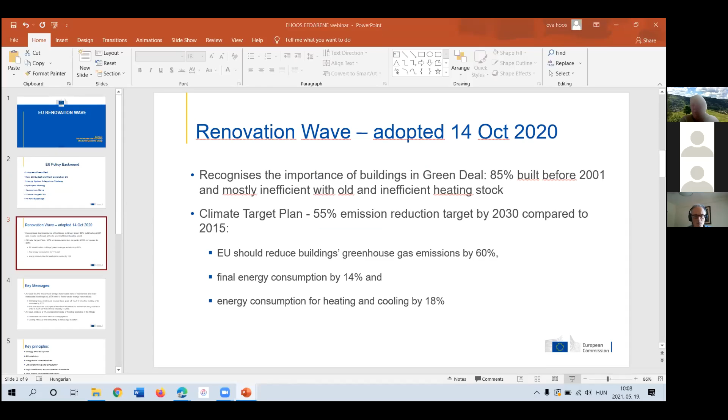So the renovation wave was adopted last October, and this recognizes the importance of the building stock, 85% of which was built before 2001. So that means basically before any energy performance requirements had been applied, at least at EU level, even if some member states already had such type of legislation in place.

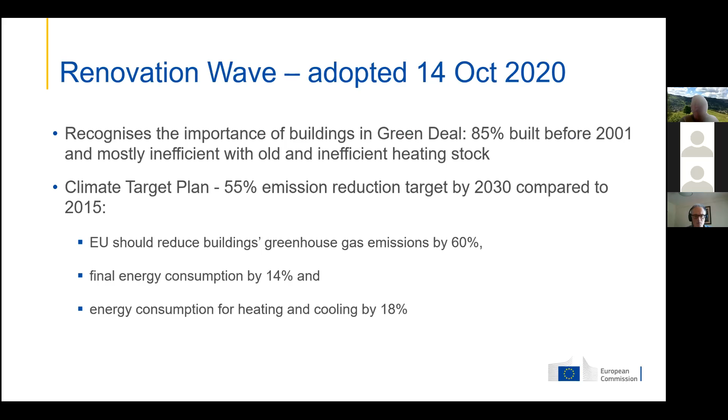As a consequence of the 55% emission reduction target already in 2030, there is a need to reduce buildings' greenhouse gas emissions by 60%, their final energy consumption by 14%, and within this, the energy consumption for heating and cooling should be reduced by 18%. The key message of the renovation wave is that there is a need to increase the renovation rate of the building stock, which currently is around 1 percentage point as an overall average.

Obviously, there are segments of the building stock and also countries or regions where there is a high renovation rate, but overall that's very low, 1 percentage point. And if we go with that rate, then building decarbonization is not going to be achieved really in the next 100 years, or it would take even longer to do that.

So there is a need to increase the renovation rate of buildings to at least double what we have today, possibly even higher. And such speeded-up renovation should continue beyond 2030 and up to 2050 to contribute effectively to the Green Deal objectives.

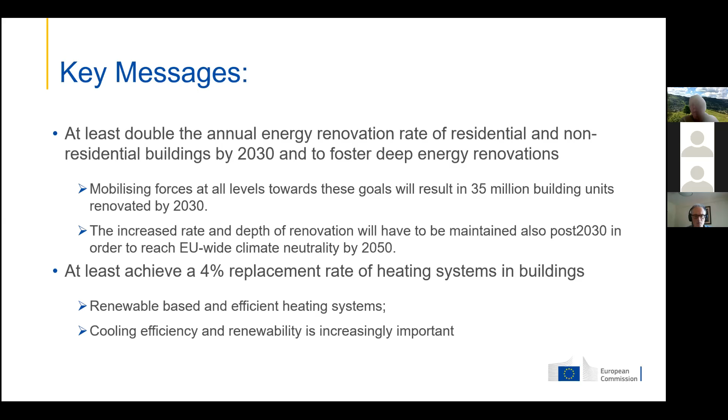A corollary of this deep renovation and staged renovation of the EU building stock is that we also need to replace the heating systems and the cooling systems in buildings, and it's not in the renovation wave, but in the climate target plan that we need to achieve at least a 4% replacement rate annually to switch buildings' heating and cooling systems from the current fossil-based and largely inefficient systems to something that will be sustainable.

The key principle of doing this work is energy efficiency first, which has been introduced in the clean energy package as an overarching principle that should be mainstreamed in all EU energy policies and even wider in all EU policies. That means that instead of focusing on new production capacities, new networks, and the related investment, there is a need first to look at whether we can reduce demand or do production and consumption more efficiently.

And then after this consideration, we can optimize how much new investment is needed in energy generation and energy transportation and distribution. A second important principle is affordability. Buildings are a big part of our lives and an important part of the value or wealth that citizens have. It's also an important component of our expenditure.

So there is an important aspect of affordability and making sure that building renovation contributes to increased well-being and also doesn't result in income inequalities and more burden on the low-income segments of the population.

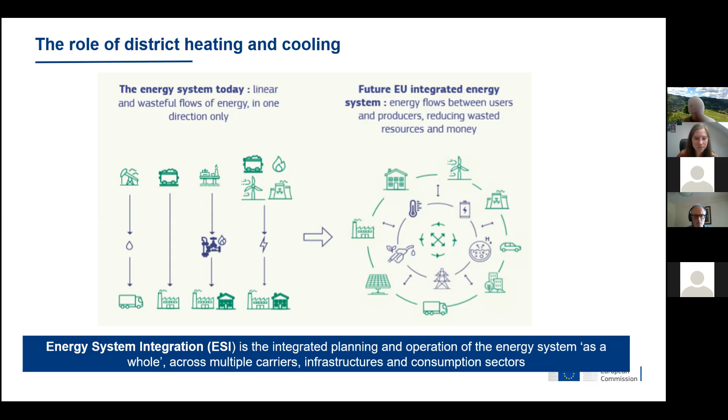The new systems that are going to be built should be fully based on the principles of energy efficiency and renewable integration, but also system integration in a way that they contribute to decarbonize the entire energy system by allowing more flexibility, by using renewable electricity, and helping optimize the energy system by also optimizing how renewables are used and how the carriers are used in heating and cooling, also allowing a connection between the heating sector, cooling sector, and the electricity sector, and the gas network and gas carriers, which also need to be decarbonized.

So the follow-up of these strategies is basically a complete reshuffling or revision of the current legislative and regulatory framework. The first step is going to be the Fit for 55 package, which is reviewing a number of directives and regulations that are interlinked, so to really be able to tackle issues that are horizontal and have regulatory components in the Renewable Energy Directive, in the Energy Efficiency Directive. Also, there is a need to update the EU emission trading system, the effort sharing regulation and energy taxation. So these are the main relevant pieces of the Fit for 55 package that is planned to be adopted already this June.

So it's basically next month to do the first stage of update for the market framework to ensure that market signals and carbon price signals are helping investment in this direction and in the green transition, but also the regulatory framework. Now, as a next stage to that, there is going to be a review of the energy performance of buildings directive with many components in it, and then this will also be followed by the eco design and energy labeling framework update, especially for space heaters and water heaters, to basically ensure a Green Deal compatibility of this regulation.

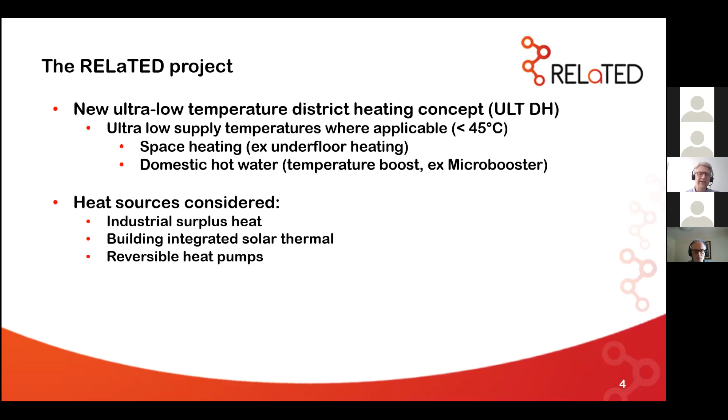The heat sources we are considering for the district heating system is industrial surplus heat. We are also looking at building integrated solar thermal. Then we are looking at reversible heat pumps, and the reversible heat pumps are heat pumps that can deliver cooling during summer, and then distribute the excess heat from the cooling to the district heating network. And then during winter, it can actually boost the temperature, either for boosting the supply temperature for space heating or domestic hot water.

And we have some companies involved in the project that are providing both solar thermal and the reversible heat pumps and also substations. So we have an overall focus looking both at system architecture and subsystems, the economy, demonstration, and dissemination.

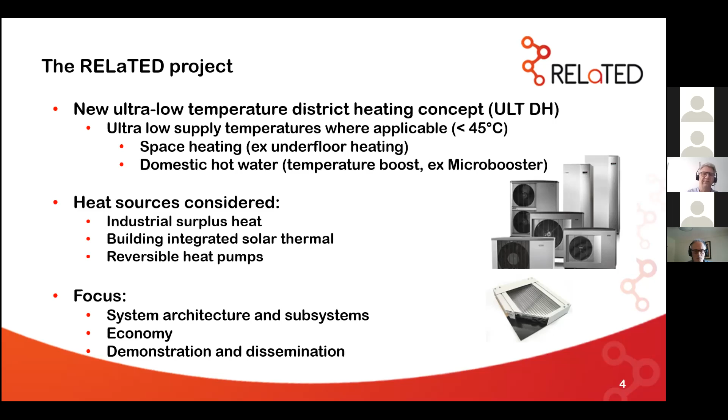Okay, so looking at catching the sun, one of the things is that many of the technologies we got are actually delivering heat at a low temperature, and they are actually also delivering higher capacity factor or higher efficiency if the temperature is low. And then when we apply low temperature, we also actually get some new design options for some of those technologies.

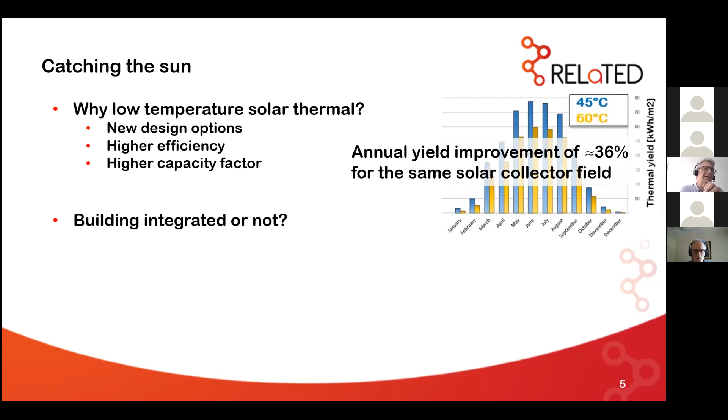Then you can discuss if we should use building integrated solar heating or not. And what we're doing in the RELaTED project is that we are looking at some different solutions. You can have building integrated vertical solar thermal, and this can actually be integrated in the building facade, so it also has an architectural aspect. And then you can of course have something on the roof, and if you look at this nearly zero energy building, then if you use the whole surface of the roof, then you will have about 50 square meters, and that is actually sufficient to deliver quite a bit of heat for 10 houses during most of the summer.

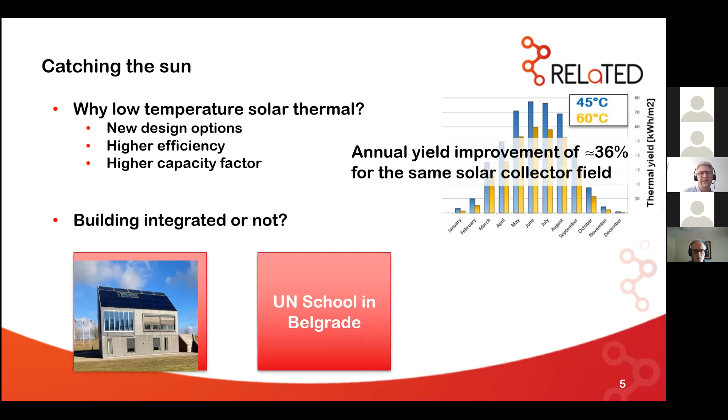We also have some larger systems in this project. We have a school in Belgrade that has some very large roof areas where we are going to integrate solar thermal. And then if we look at what has actually been quite successful in Denmark, you can also have large solar thermal fields. In Denmark, we have more than 1 million square meters of solar thermal installed in our district heating systems now. So, this has actually been quite a success.

The case is that solar thermal in fields is more cost efficient than integrating it into buildings. On the other hand, if you look at the cities, land is a scarce resource. So in those cases, it could be better even to integrate them in buildings, even if it's more expensive.

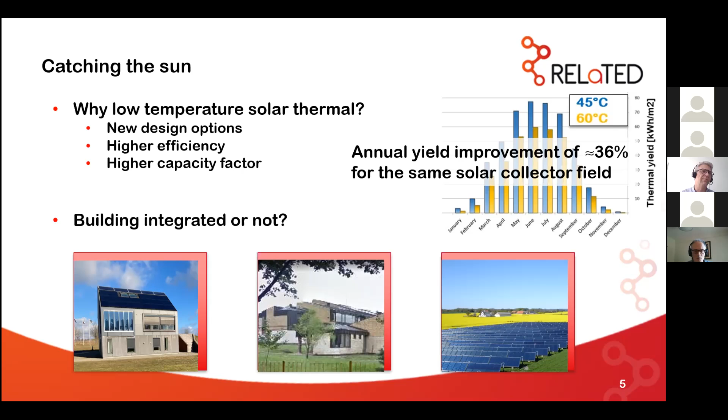Okay, we are gaining some experiences with those integrated solar thermal systems, and one of the places where we do this is in this demonstration facility at the Danish Technological Institute.

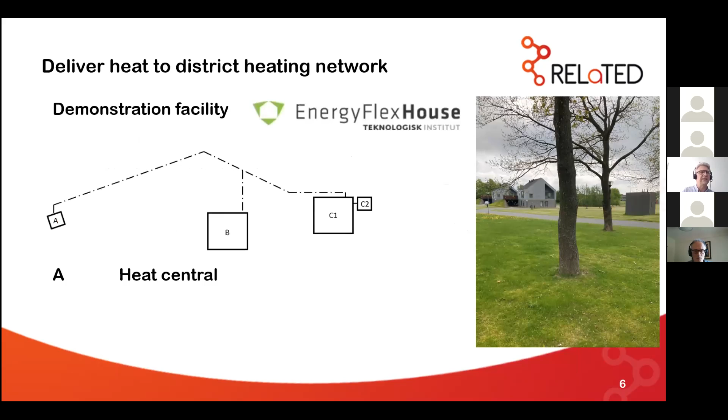We got a system. If you look at A, here we got a heat central, then we got a district heating network distributing heat to a nearly zero energy building, where we have solar thermal integrated, a substation, and a micro booster. The micro booster is a water heater that gets some of the heat from district heating and then boosts the temperature with an electric heat pump.

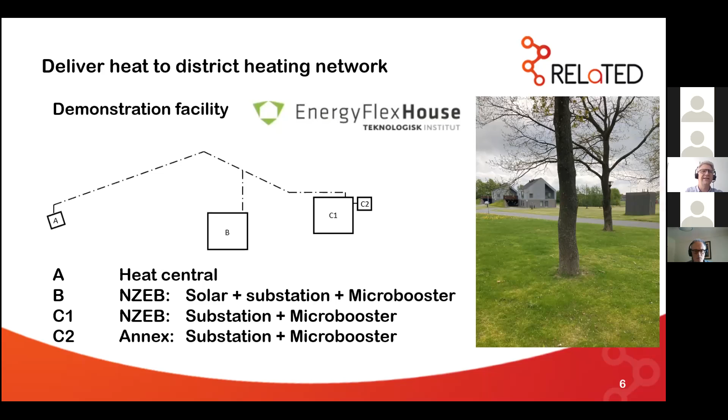Then we have another house, C1, also with a substation and micro booster, and we have a small annex where we also have installed a micro booster and a substation.

So in normal mode, we are taking in district heating, as you usually will do, to deliver space heating and domestic hot water. The water is coming back and goes into the return of the district heating system.

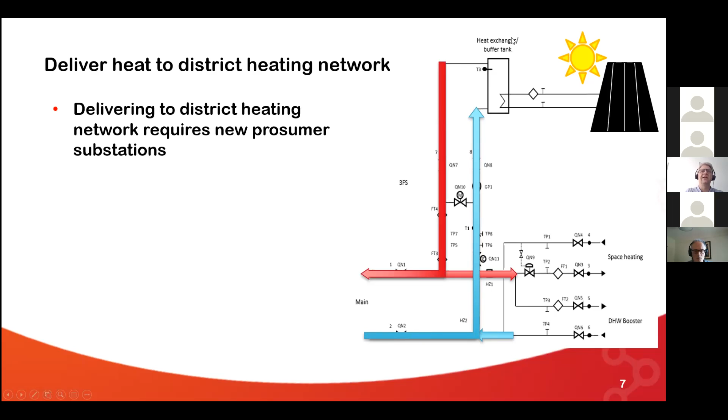When the sun starts shining, the water starts heating up, and when the water is high enough, we have a temperature measurement here to deliver heat to the district heating system. Then we reverse the direction and take in heat from the return pipe and deliver heat back to the system.

To do this, we need to overcome a pressure difference in the network, and we have to control the pump very specifically on that. So this is actually the challenging part of this, to have all this working with the two directions and the pump.

This we call delivery for the supply. But you could also have delivery for the return pipe, and we are also investigating that in some other substation designs, and this will create value.

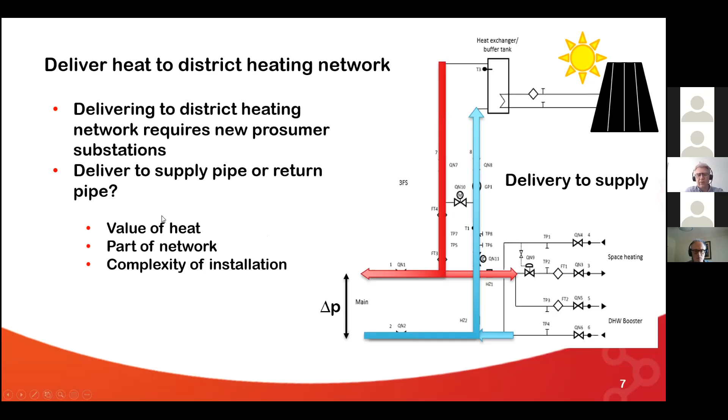To decide if you should deliver to the supply pipe or the return pipe, you need to look at the value of the heat. In some schemes, you do not want to have a higher return temperature, and then it will have more value for the system to deliver to the supply pipe.

You also have to look at what part of the network you are in. If you are, for instance, at the end of the network, it's not easy to put it into the supply pipe. Then you need to put it into the return pipe, and you also have to look at the complexity of the installations needed to do this. So there are some things you have to investigate on site to decide what kind of supply you should do.

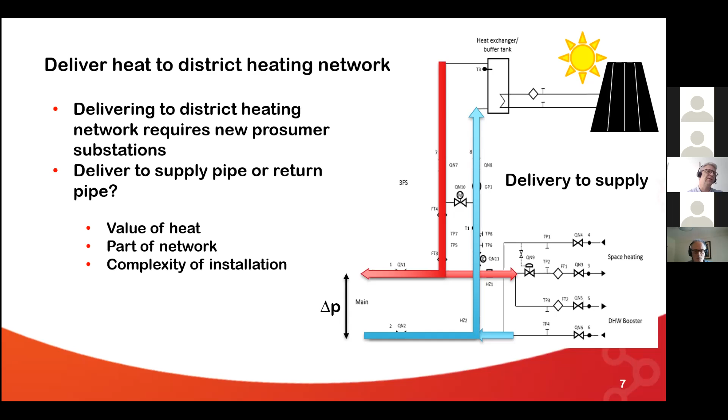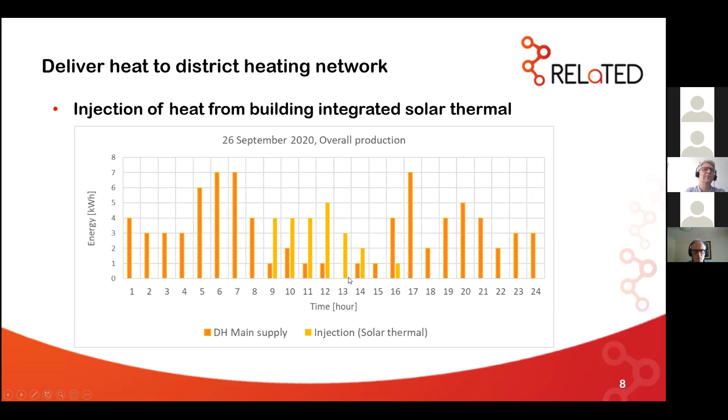At the time of day the sun starts shining, we get some heat injected into the system. But you can see this is, of course, only when the sun is shining, so this is not incorporating any storage.

But in the system, we actually got small storages in every apartment or every dwelling. We got a storage here of 185 liters, and this is the micro booster I talked about before.

So if we look at the tapping of domestic hot water, we got here some tappings during the day. And then when the temperature drops inside the tank, the tank will start charging.

This is done by charging by district heating, which is what we see here. And then on top, we are supplying some electricity to raise the temperature inside the tank to a sufficient level.

Okay, but as you see here, this is actually in some kind of off mode compared to the solar production as we saw before.

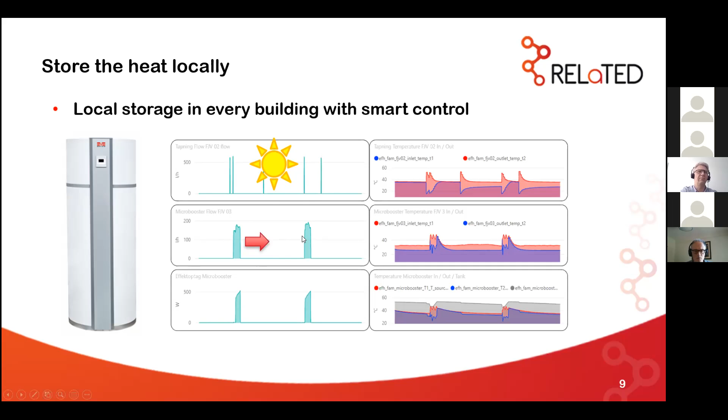So we have here the sun shining during the day, but our consumption is actually outside the period where the sun shines. So to optimize the uptake of the sun, we actually need to move this charging to another period of the day. And that is what we are working on right now, and what we are going to implement during the summer, so that we can control this by price signals, depending on the forecast of the sun and the electricity price.

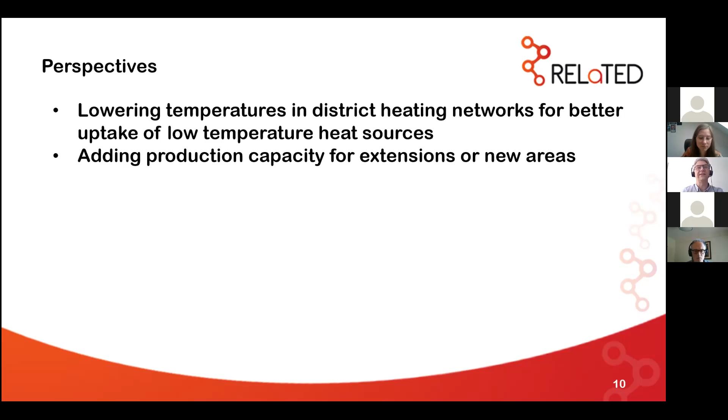So if I should summarize what we get out of the RELaTED project: we are getting experience with lowering the temperature of district heating networks, and that will facilitate the uptake of low temperature heat sources, and also the efficiency of some of the sources we are going to use. By introducing those distributed energy resources, we can add production capacities, either for extensions of networks or for completely new district heating areas.

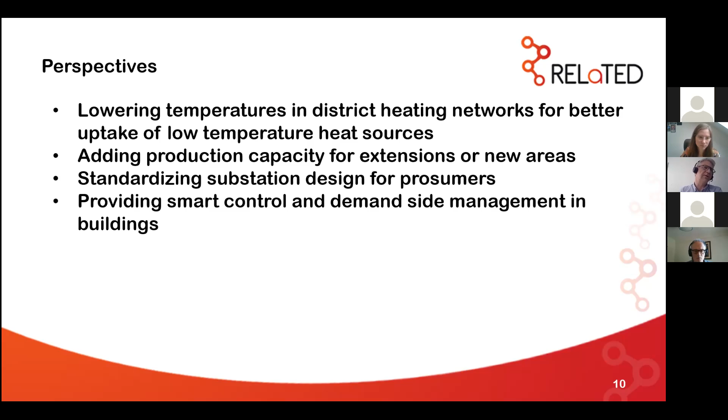One of the experiences we can share already is that we need some kind of standardization of substation design for prosumers, so we can ease the use of the solutions. And we also think there are good opportunities in providing smart control and demand-side management in buildings. Because the controllers of, for instance, the microbooster are quite advanced, we can also start aggregating storage capacity and flexibility in the district heating network, coordinating the flexibility of many sources.

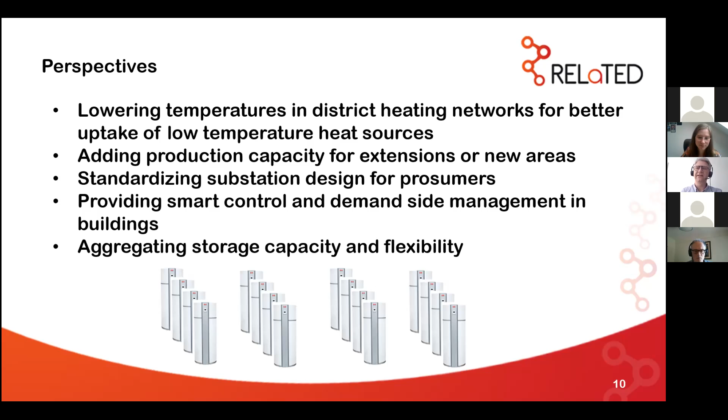Yes, I think that was what I will say today.

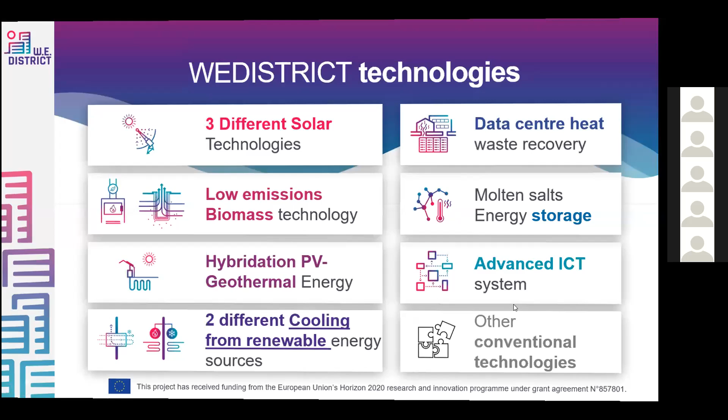Within the solar technology, we are focused on concentrator technologies, mainly the parabolic trough collector, the Fresnel collector, as you can see here, and a new one that is the Advanced Tracking Concentrator for fixed tilt solar thermal collector. That is the one that we are going to talk to you about in more detail.

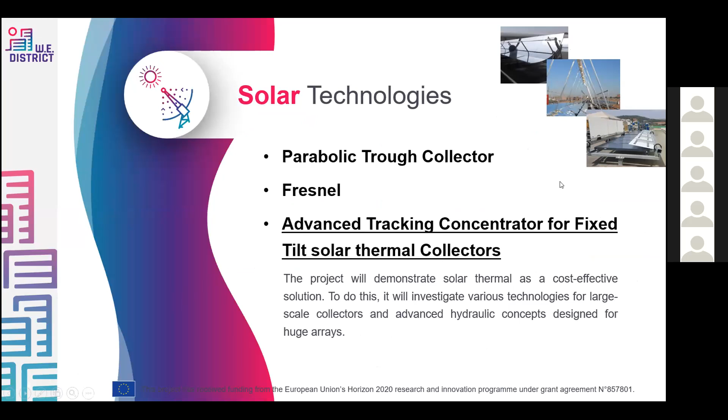As expected, the main results from WEDISTRICT are this 100% renewable district heating and cooling system, a portfolio of replicable solutions for district heating and cooling systems, and we expect also to attain a higher public acceptance for DHC systems.

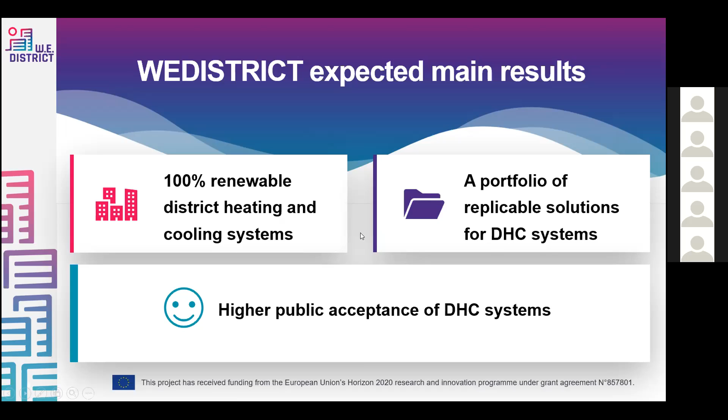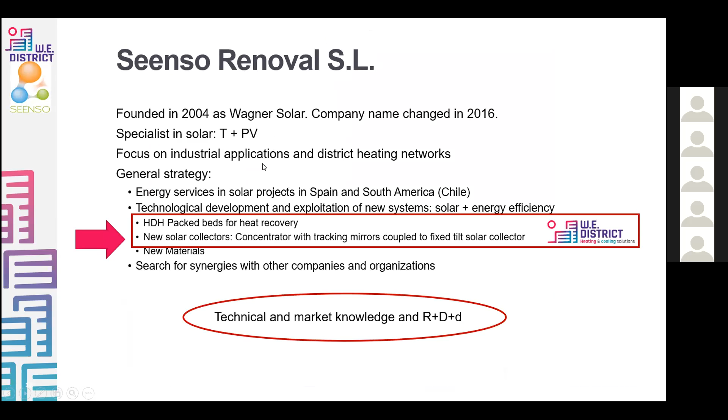Talking a little bit about Seenso Renoval, it's a small company, founded in 2004. We are specialists in solar thermal and solar PV, and we are focused on industrial applications and district heating networks.

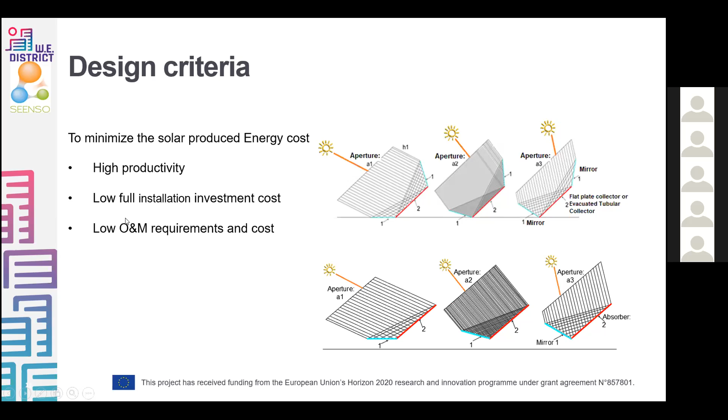The design criteria in general is to minimize the solar produced energy cost. That means high productivity, low full installation investment cost, and low operational and maintenance cost.

The tracking movement of the mirrors can do the tracking on the east-west or north-south tracking axis, or any other. Also, it gets a quasi-homogeneous distribution of radiation. It doesn't generate peaks on the absorber.

That means that whenever the velocity, the speed of the wind is high, then the mirrors can fall down and protect against that load. And the same with high temperature.

We can also improve the land use compared to the conventional tracking system. We also generate greater operational safety, related to the automatic protection against wind and overheating, which means a reduction of structural installation requirements.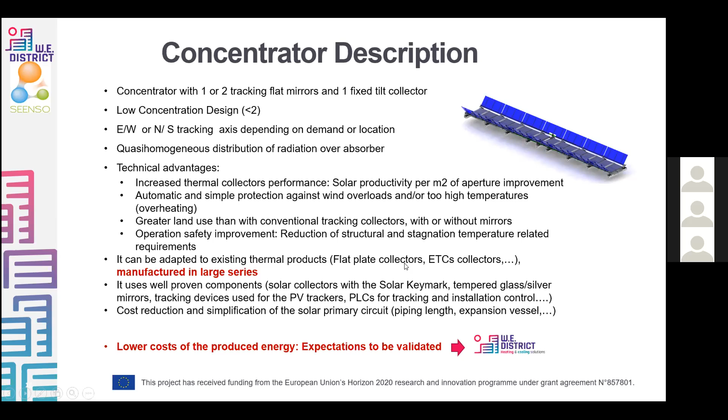As the name of our product was difficult to repeat for our partners, we decided to change the name and the logo, and instead of saying TCFTC, that means Tracking Concentrator for Fixed Tilt Collectors, we have changed it to WeSSun. We smile with the sun, and this smile resembles the shape of the concentrator with the absorber and the mirrors.

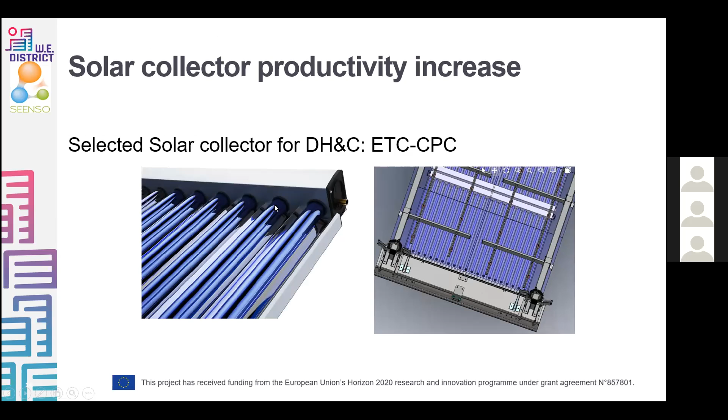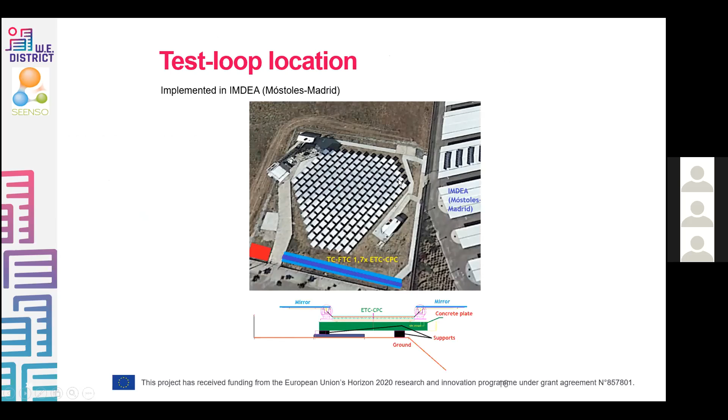Regarding the results of our prototypes, here you see, for example, the selected collector. We use, as I told you, a conventional collector, in this case the vacuum tubular collector from Linuo. And we have tested it in IMDEA. It's a research center in Móstoles, quite close to Madrid, quite close to a small heliostat field that is there already.

Here you see some photos of the current situation of the test loop. The main characteristics are here. The nominal aperture area is 122 square meters. The tracking axis slope is 1 degree, almost horizontal. The tracking axis orientation is south-southeast, and we have a storage of 10 cubic meters. We started this campaign at the beginning of the year, and we have extended this campaign, and we plan to finish it in summer.

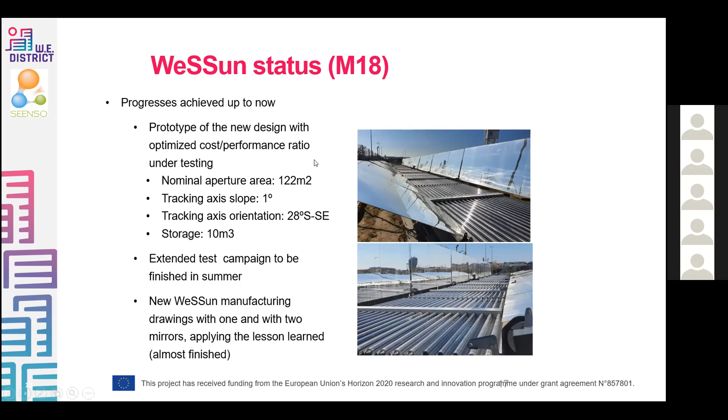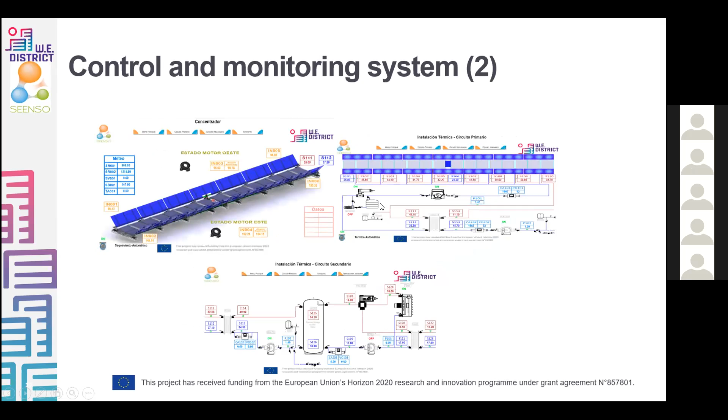We have learned a lot on this prototype, and with that lesson learned, we have modified a little bit the drawings of the system, and we will manufacture the new version to be implemented in the Alcalá demo site. Here, for example, you see the main screen of the control and monitoring systems, where we can follow the tracking angles and the temperatures, flow rates and radiation levels on all the systems.

Up to now, we have performed the tracking and operational controls. We also have checked the flow unbalance and pressure drop models, and also the structural performance test. And the optical and thermal performance, well, we have done a lot of them, but it's still underway. We want to continue doing that. But we are focusing mainly on how to improve the mirror cleaning. And we want to implement a constant outlet temperature of the solar field algorithm. Also, we are going to test the effect on the PV production with this design.

Here you have the expected results of the efficiency curve. Here, our approach is different from the one you have in the ultra low temperature district heating and cooling. It's clear that the best solution is not universal. That can be different in different countries, depending even on the price of electricity, and on the price of the heat pumps and the small booster heat pumps that you plan to use. In this case, as you can see, we are able to work at quite high temperatures with a very good efficiency. The normal range will be up to 120 degrees C, but typically for district heating, we plan to work in the 80-90 degrees area.

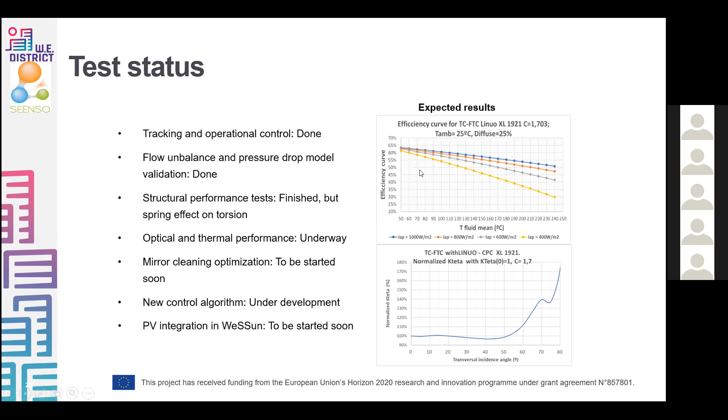Regarding our next activities, we plan to continue with the optical efficiency test, with the instantaneous and daily efficiency, and also with all the tests related to the deformation and torsional performance of the structure. We have prepared a TRNSYS-based simulation program specifically for that, and one thing that we are currently doing is to validate that performance. We have got quite good results up to now, although we want to continue doing further tests to additionally validate this simulation.

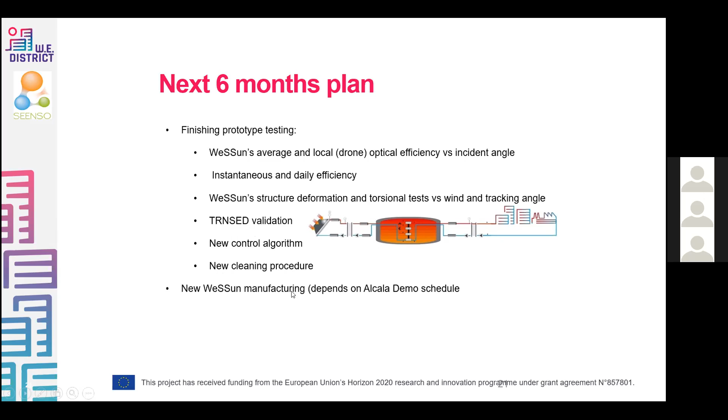As I told you, we are also working on the new control algorithm and the new cleaning procedures. And we plan to do the manufacturing of this technology for the Alcalá demo site quite likely next month, perhaps July, it depends a little bit on the schedule of the demo site. Summarizing, the main applications that we see for this concept are new and existing low and high temperature district heating and cooling systems and process heat applications for quite a huge range of temperatures, between, as I told you, 50 and 120.

Well, as an example of what can be done for existing district heating and cooling systems, you can see here, for example, the normal solar installation in the district heating and cooling with flat plate collectors. And the idea here is to boost the performance, to repower the performance of the solar field by installing a mirror in between. With the normal distance of many of the solar fields, for example, in Denmark, that is possible to do it without a significant problem in

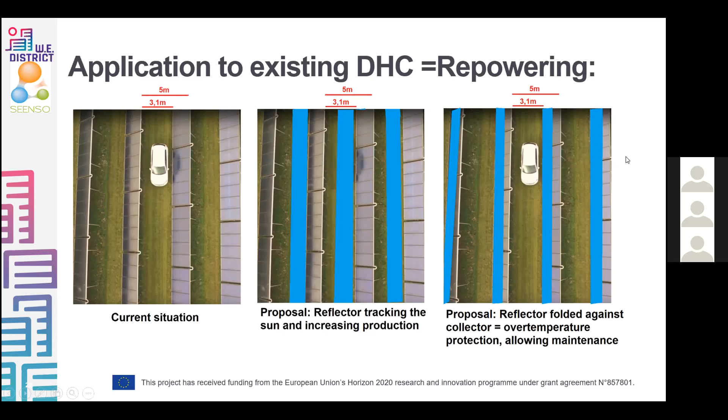spring, summer, and autumn. As it was shown, for example, in the previous presentation, the solar system production in the northern climates is quite small. That means that you don't lose much, and most of the production is done in this period. Of course, in case you need to clean the mirrors, to clean the collectors, or to cut the grass, you can fold the mirrors on top of the collector, and you can do the normal maintenance.

Okay, some questions, please. Thank you so much. Well, I think as well, you were very, very clear. Thank you again for your presentation. I don't see any question in the chat box, and actually I see the timing. We only have 3 minutes left.

So what I would like to ask my speakers, if they want to join me with their camera, maybe one final word, one final remark that you would like the attendants to take away from your presentations and your projects and the EU policy on this. Anyone would like to start? Yeah, please. Yeah, good morning again, Clémence.

I actually have questions to the presenters of this really very useful project. So the question is, for the RELaTED project, do you see this kind of new technological solutions that are really exceptionally useful for decarbonizing both heating and increasingly cooling? What do you see? Is it easy to implement, for example, in existing networks?